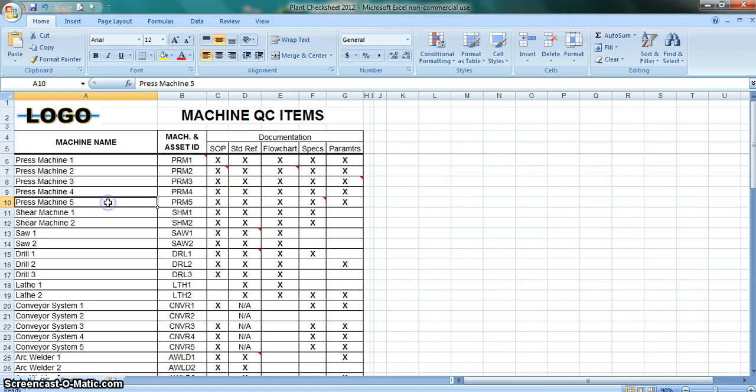So on. Safety evaluation, job hazard analysis, PPE required for the station, health hazards, hearing, respiratory. It's a biggie for California. Hearing and respiratory are the big ones that stand out the most. Let me see what we have on here. Standard work, standard reference, flowchart, specs. This is actually on your engineering one more than it is quality, and engineering both, though, when it comes to having the correct parts. Get this back over there.

All right, let me go ahead and bring up the spec sheet. So here's your airline coming in, the inlet. You have your airline regulator, you have your filters, oil filters, so on, air dryers too. This I used as an example is a Micro Air dust collector. These are very easy to make. As you can see, I used Excel. I'll give you a quick example of how I made it. Let me pull it up.

See, I already have it on the exploded view. Let me go back and show you how I got to it. Keep going. So you type in the name of the machine, say in Google. Go on the internet, type it in, and you find it. Here it is. Micro Air dust collectors, Micro Air, the manufacturer of the machine. It can be like a DoALL saw C3300, whatever, your KRB shear machine, whatever the machine is. Type it in. Or if you already know your manufacturer, vendor information, type it in, go right to it.

And then you go over here, machine product specifications, which I already did. Make sure it's the right one. Ours is RP4. Where do we go? We go forward. So RP4, bring it up.

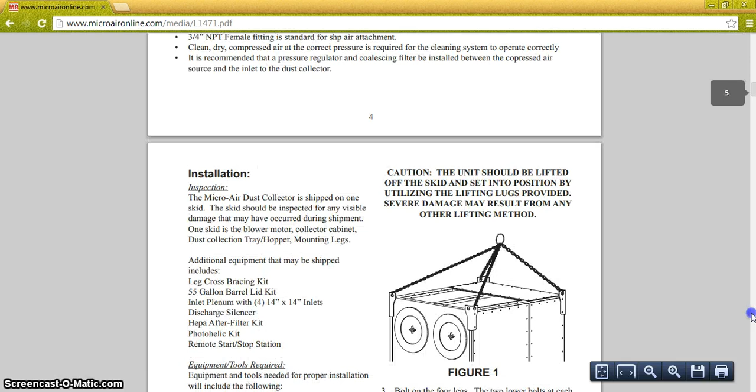There we go. Owner's manual. And that's where I was at. The owner's manual, I had that one picture. It shows the exploded view. Exploded view is very important. It's a lot of details in one little picture. Shows you the assembly, shows you the parts, and it's a picture. It's not words. It's easy to find.

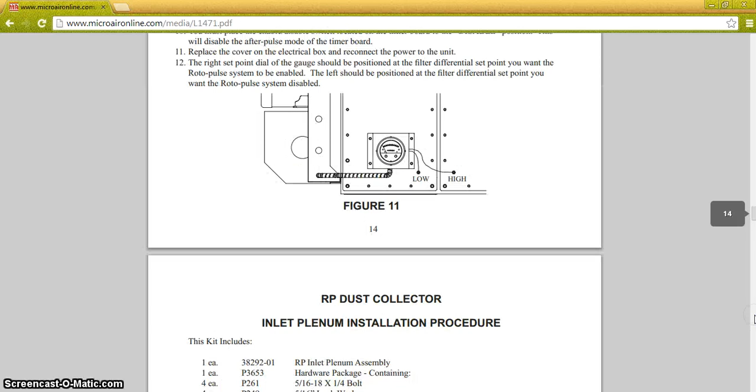Where was it? Turn that off. Let me find my exploded view. I know it's in here somewhere. I'm going to just show you how you can quickly take it right out of the manual. And what you're doing, there it goes. So, and you also have your part numbers down here, your exploded view here. But again, you want to apply it to your manufacturing facility, practical application for you.

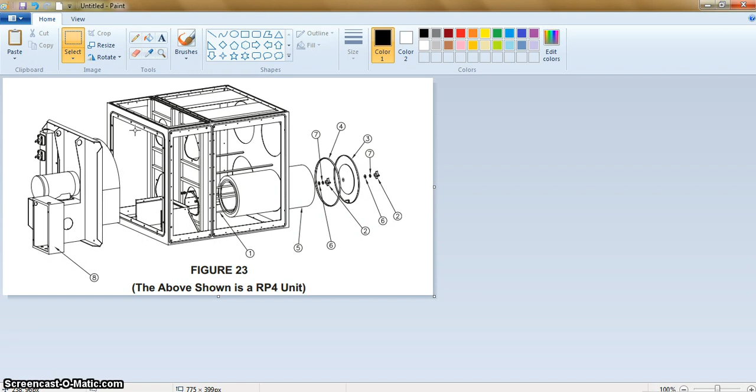So you bring it up like this on your screen. You hit print screen on your computer keyboard. I already have Paint open. Like Paint, oh, see, I already did it. But here's good. Then just hit paste. As you can see, I already did it on there. Then you can bring it up here, crop it. You can take out these lines, erase them. Just a quick example. So it's going to take time, but you build it, and in the end, it'll be very beneficial. Get back over here.

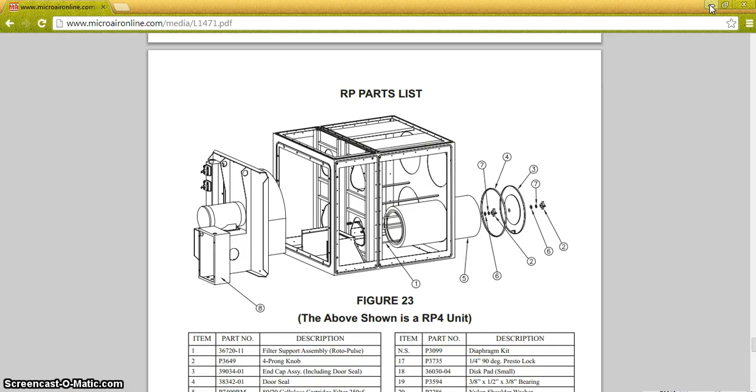Then you import the picture on your little template here in Excel. As you can see, I did all these little pictures I imported. I did my own little numbering to the parts. These are mainly just examples I need to fix a little bit better. You do your template here, use your company logo, whatever your branding policy is, whatever your colors are. This is a typical blue bar outline like you see in parts catalogs. Whatever your company colors are, then go ahead and make it those colors.

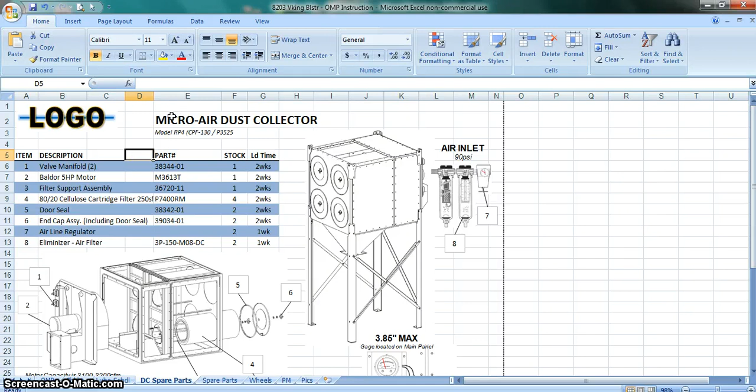Branding is very important on all your documentation. It helps build pride, teamwork. You should look branding up on the internet and you'll see what I'm talking about. So anyway, you have a big title of your machine here. This is just one little item off of that checklist of yours. Pull it up. You're going to have basically an overview of the machine, what it looks like. That helps automatically find the document you're looking for as well.

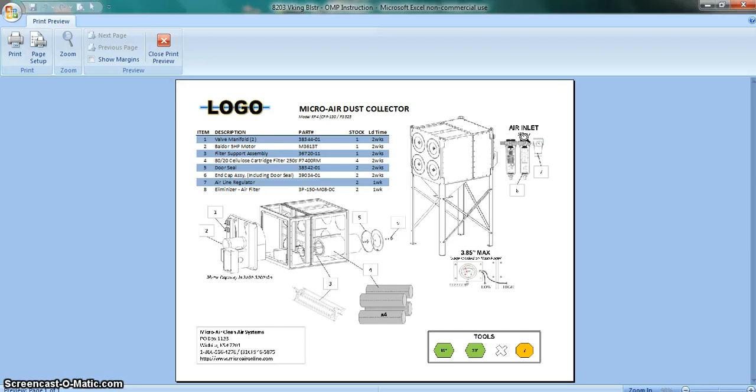Your inlet pressure, what the recommended pressure setting is on your airline regulator. And you're going to have your gauge marked out as well, which is very popular in manufacturing now. Your cartridge filter pressure, let you know when it's clogged, when they need to be changed out. That's very important for air pollution control, which I'll show you another document that relates to that too. So just kind of look at it overall.

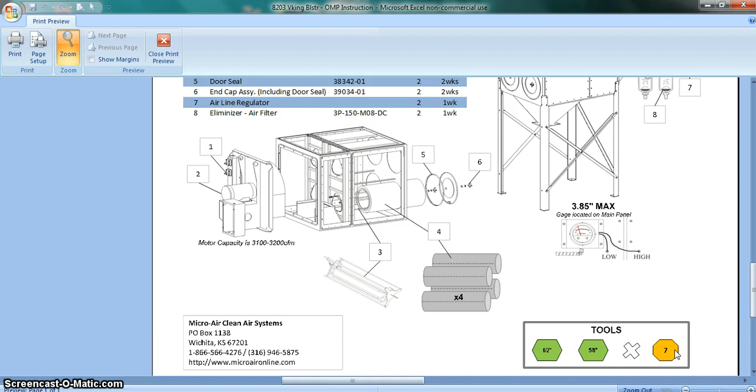You have your exploded view, you have your parts, your part number, your stock, how many you need in stock, your lead times, contact information, who the manufacturer is, website, phone number, so on. What tools are required? You need a 1/2 inch or 5/8 inch, both. Wrench with a Phillips screwdriver, maybe a number 7 Allen wrench. These are just examples. Without volunteering too much information, I kind of change these around a bit. So you come up with your own template if you want. Like I said, I use Excel. It helps a lot.

Phone keeps going off.

Particular flow diagrams. Then you can also make this as well. In California, we have San Joaquin Valley Air Pollution Control District, who regulates our air pollution control. This is one of the dust collectors we use. Again, you put your company logo on it. You show where your particulate dust comes in, the clean air goes out, what type of filters you use, what your pressure gauge is, or your max pressure gauge, pressure of water column, and it shows how clogged they are, and also with your pulse timer, the pulse cleaning.

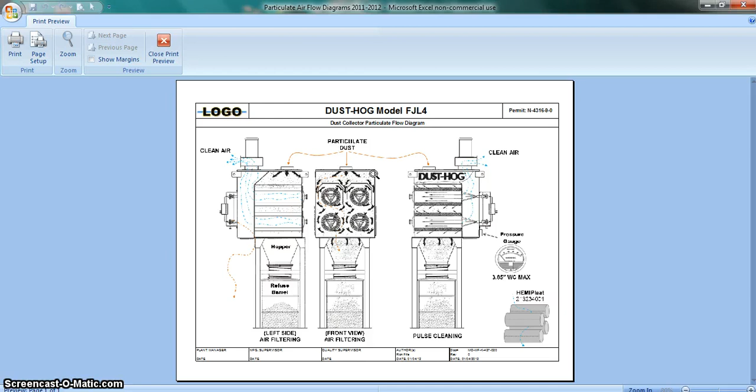And definitely, like with air pollution control, you have to have spare cartridge filters on hand to pass your audits. So again, here's just another example. Again, this was done in Excel. Make your header, put your logo on it, your permit number. That's important. And all your other information on here, whoever signs off on it, so everybody approved it.

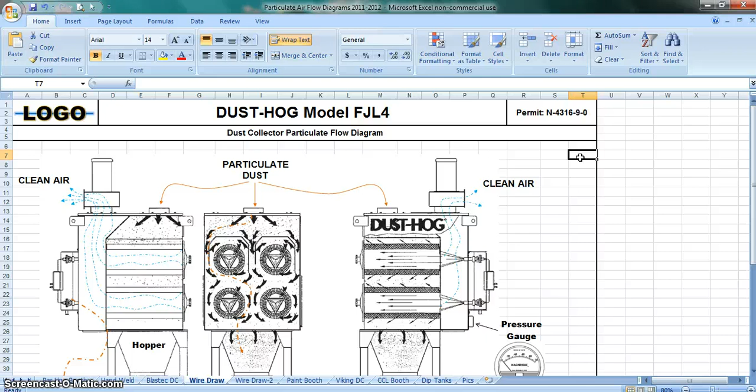Whenever you do something, you always do it in teams. You always involve every department. It's maintenance, quality, production, engineering, which is like above maintenance, and quality sometimes in some work environments.

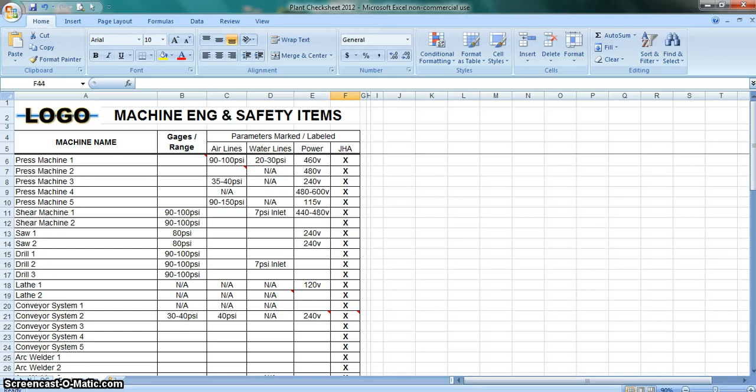I believe that is it. I don't know if I hit my 7-minute mark, but you get the idea. There you go. Alright, I hope it helps you. Like I said, it does reduce your downtime as far as looking for parts. I'm at 9.5 minutes. Alright.